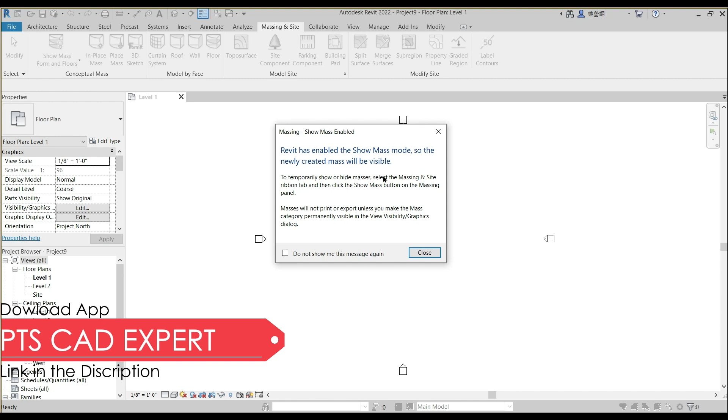If you click in place mass, this dialog box will pop up showing that Revit has enabled show mass mode, and so the newly created mass will be visible, and mass 1, and it opens up the mass environment. Another approach is while in project template, if you click on component and if you click on model in place and you navigate to mass and it will say mass 1, that will also open the same work environment.

The last but not least and my preferred option is while in home screen of Revit under family section, if you click new, it will navigate to this folder, and if you have your libraries extracted properly and in English Imperial folder you have all these template files, and in this you open up this conceptual mass and open up the mass template.

So all of these different approaches open up the same work environment, and we have the same tools for modeling purpose, but it is slightly different from what we used last time. Let me open up real quick and show you. There is new family and family templates English Imperial, and this is the template file generic model which we used last time.

And the difference here is that you can model a 3D element using this template, but it has these 3D drafting commands which we used last time for modeling a 3D parametric door. But today we are going to explore this conceptual mass environment, and I'll show you how those 3D drafting tools can be used in this environment, which is visually also a bit different.

That is, you can see that the background has this typical gray gradient, and it has the reference planes, that is the center, front, back, and left, right connected to it, and reference levels. Eventually, both the template files do the same thing, that is modeling a 3D element, but they do so by using different approaches.

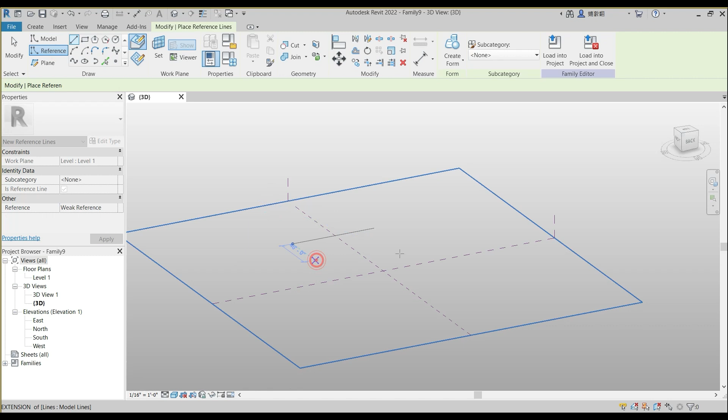That is, in mass environment, you have model-based forms using model lines and reference-based forms using reference lines. So to use these tools, I will set plane, and when I click a line, you see that it by default selects the model line. And if I draw a reference line, and if I get closer, you can see that the model lines are black in color and are a bit bold, then the reference lines, which are a bit thinner and purple in color.

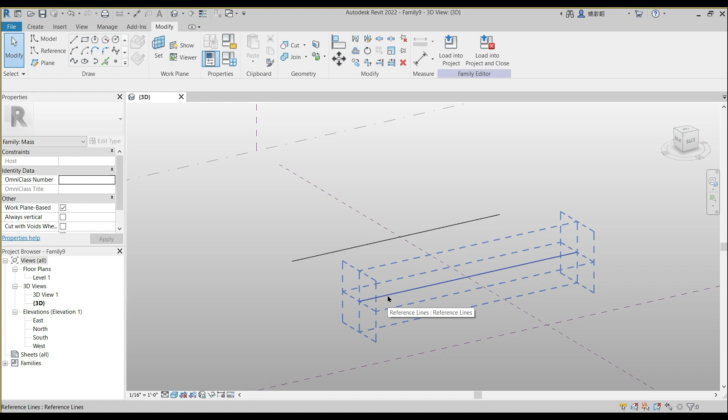Another distinct feature other than color is that when you hover your mouse onto this reference line, they have the integrated work planes connected to it, onto which you can actually model a 3D element and host a 3D element. And when you model a 3D element using the model lines and load them into the project, they are visible, whereas the reference lines are not visible in the project environment.

So despite the subtle and negligible differences, both these lines do the same thing, that is modeling or hosting a 3D element. Now the 3D commands that we have in generic model template files, we don't have them here, but how do we do it in this environment? And that I will show you.

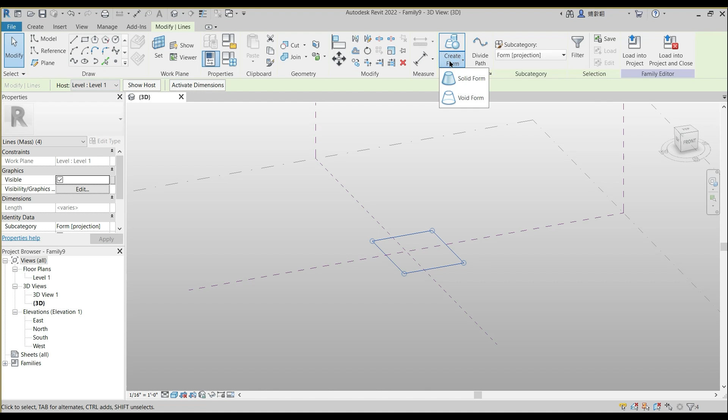So let's click on this rectangle, and by default it selects the model category, and by going to the set plane, I'll pick a plane and I'll draw a rectangle onto this, and now I'll just click this rectangle and drop down a solid form, and you see it creates a solid form that can be edited and that can be elevated to a specific height. So this was about extrusion.

Now blend. For that I need to create one more level, and yeah, it's already there. If not there, then create levels, and from here you can drop a level. And now I will set plane, and I will click this plane and go to top and draw a rectangle onto that, and from here I'll set plane, and placement plane I'll select level 3, and there I will draw a circle.

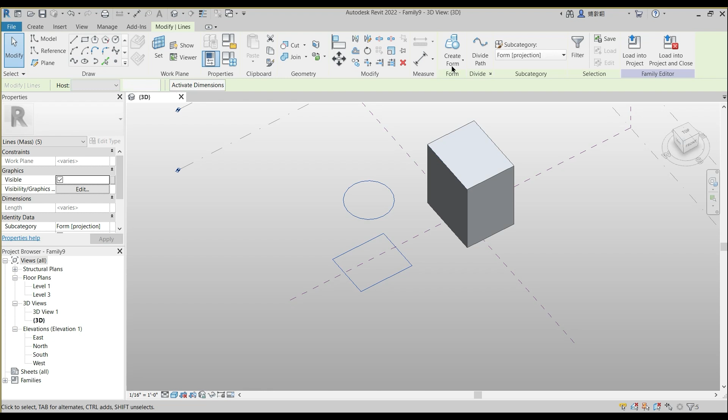So both of these elements are on different work planes. So if I select this and then this and go to create form in solid form, it will create a blend.

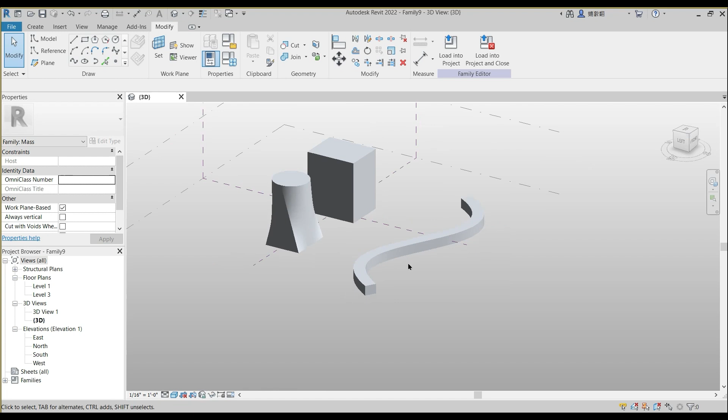Now let me show you sweep. So I will say spline through points, and I'll set plane, and I will draw a spline through points on that plane, and then I'll select this point and I'll draw a rectangle. And sweep is something which references a profile along the entire path. So I'll select this rectangle, I'll select this path, and I'll say create form. So there it is.

Similarly, we can also do a sweep blend. So how is that? So again, reference line, spline through points, and I'll set this plane and I'll draw a spline onto that. But this time I'm going to say set plane. I'll pick a plane and I'll draw a rectangle onto this.

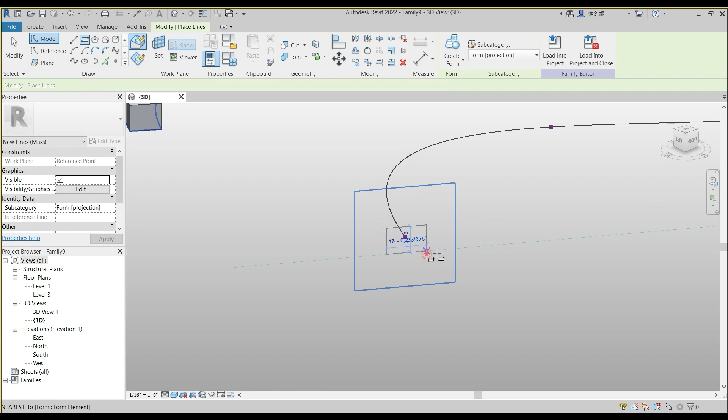And for a blend, I will select this point and select a circle and draw a circle onto that. And now I will select this and the circle, and there we go. Yeah, so this was sweep blend. That is, it is referencing two different profiles at either ends. Okay, so this way you can create 3D elements in the mass environment, which is a completely different method than what we saw in the generic model template file.

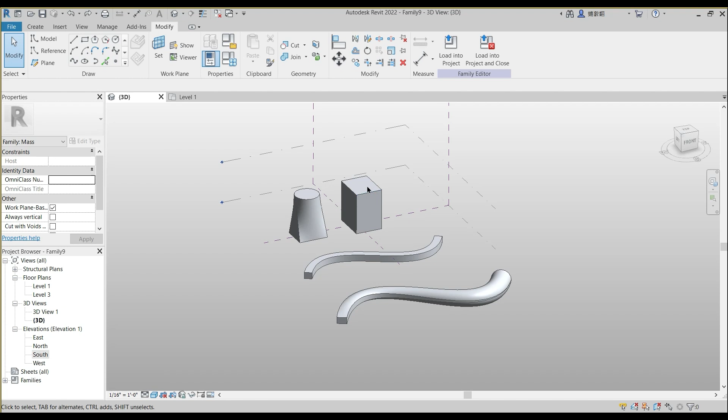Again, you can furthermore edit these 3D forms and manipulate them. Let me show you how. So I'm going to select this reference plane. I'm going to draw a couple of reference planes, copy, say, 25 feet on this side. Again, copy 25 feet on the other side. And I'm also going to make some reference plane here, 25 feet. Okay, CO, copy and 25 feet here.

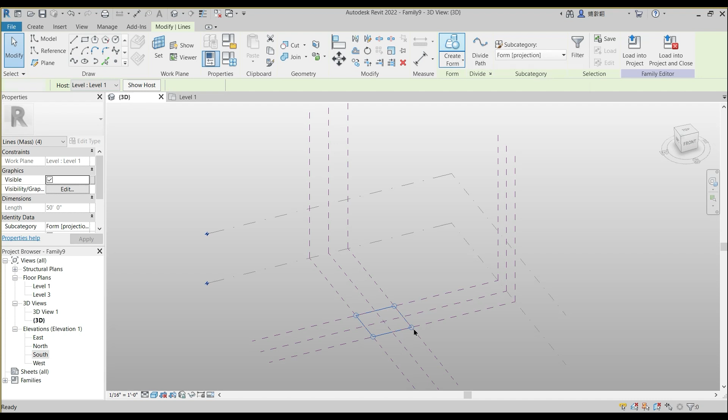Yes. And now I'm going to set plane, pick a plane, go top and rectangle and draw a rectangle onto that. And I'll select this rectangle and I'll say create form, and I'll pull this arrow up until it snaps to this upper reference level.

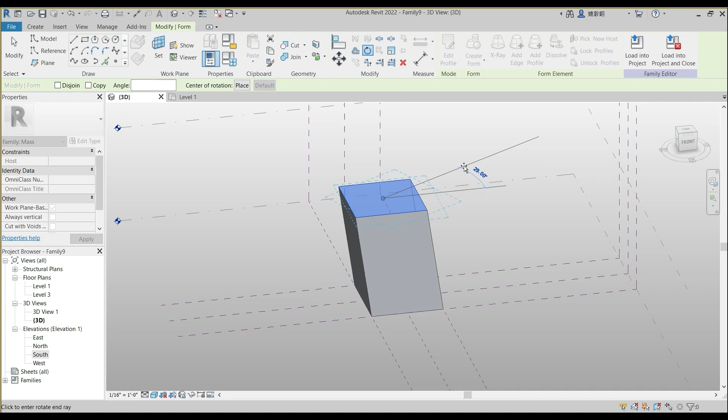So how can you manipulate this 3D form furthermore? And what is the difference when you model a 3D element in the mass environment? That is, you can select these individual faces and play around with them. For example, I select the top face. I can move it by pressing these arrows. I can play around with the gizmo, and also I can RO, rotate the upper profile a bit, and you have this twisted 3D mass element. And this ability is not there in the generic model template file, wherein you have to do everything manually.

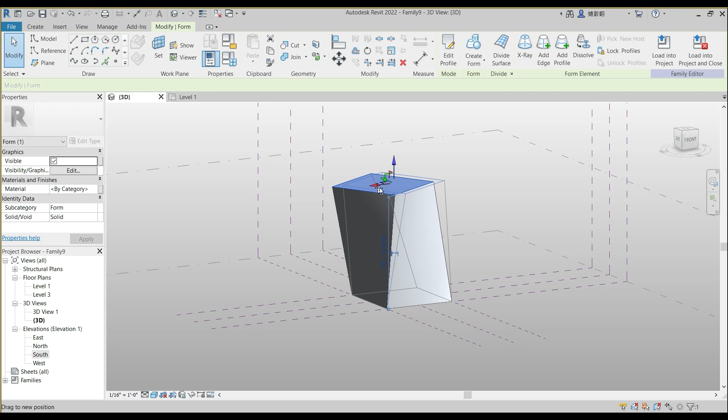Also, you can pull this up and you can press this arrow and make it slightly bent. And one more feature is that you can also select the edges and you can pull them in or out. And also you can make it up. And you also have these points on the end points of the edges, which you can also edit. Say you want this point a little bit up. And we have our organic, crispy, fascinating form. It's like that.

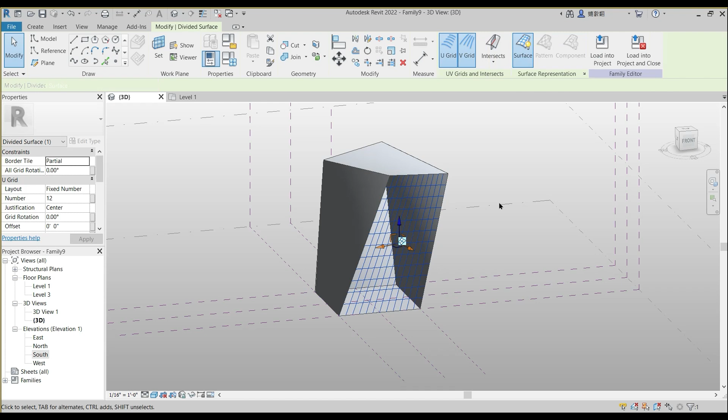What further can be done to this? You can select individual faces of this, and then you can divide the surface. Okay, no, not divide. First I will select this and turn the X-ray mode on, and it will show all the points varying from where it was created. And if you ever want, you can select this and add a profile. So I'll add a profile here.

And now I can select this and drag it a little bit up, and you see this has formed a bend between these two top and bottom edges.

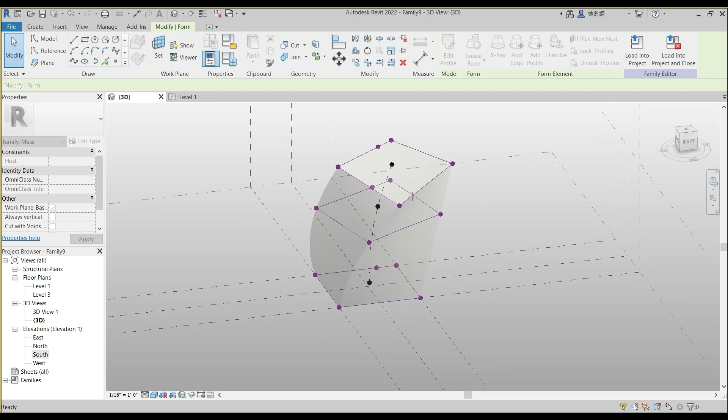The same way you can also pull out this, and also you can select whole of this and say add edge. And you can add edges to this form, to the vertical faces, and automatically, as soon as you add the edges, it adds this point and the line, which you can further manipulate and edit. So that is how it goes.

And I will add an edge onto the front face, and now I will build up, and we have a 3D organic form. And I will turn off the X-ray. Now what can be done to these faces?

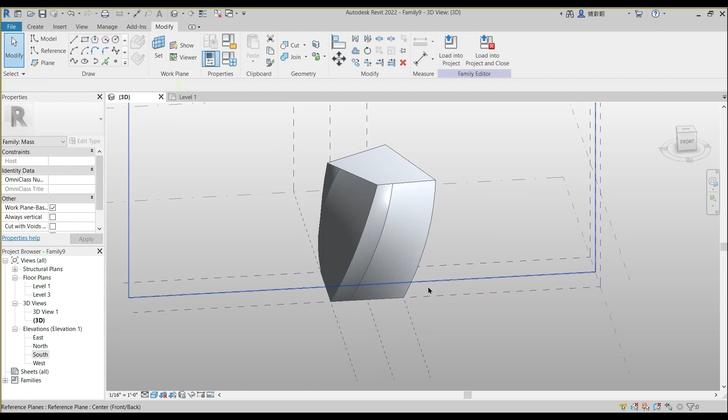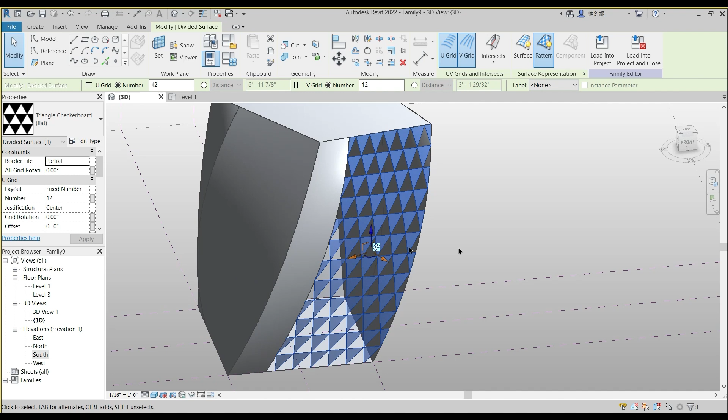For example, if I select this particular face, I can divide the surface. And I can add different patterns to it. For example, you see this is a triangular checkerboard pattern, and the rhomboid, and this is the rectangular checkerboard pattern. Yeah, but this is just a 2D element which doesn't have any thickness or mass, and it is just a pattern.

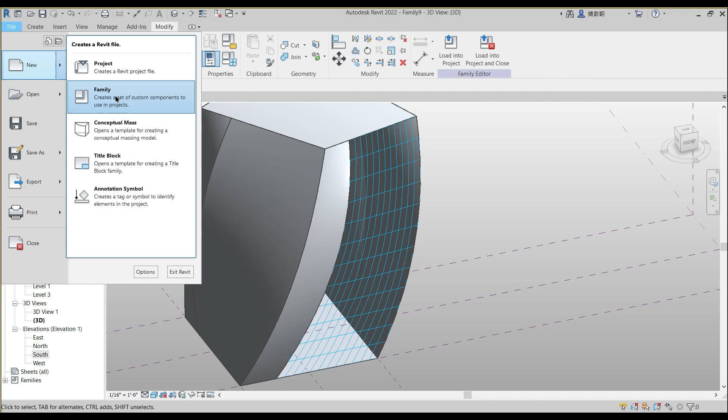And how can we further edit that pattern? For that, I will go to no pattern, and we will have this grid, and I will edit this grid. And how will I do that? Okay, so that is again a different file and a different template file. So from here I will open up this family, and by going to the Imperial folder, we have this generic model pattern base, or the curtain panel pattern base.

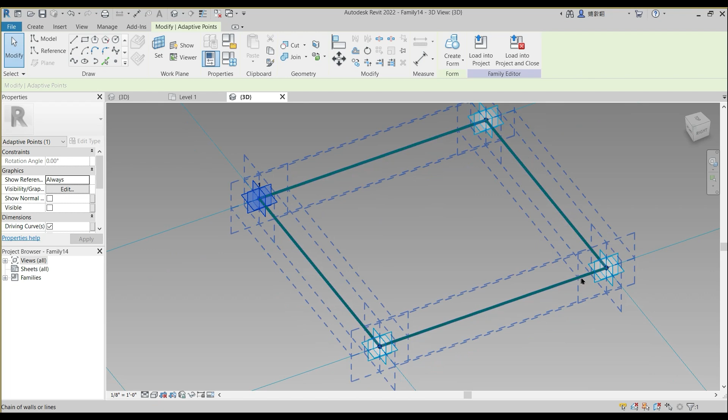Both are one and the same, but the only difference is that when you schedule or quantify it, Revit will read this file as generic model and this as a curtain panel. So for now, I will open this generic model pattern base, and it will open up this grid with the 4 adaptive points. When you click on the points, it will say 1, 2, 3, 4, and these green thick lines are the reference lines.

When you click this grid, and again drop down, you have the same list of different patterns which I just showed you, but that pattern is just a 2D element, and if you ever want to build thickness to it or design a parametric element, you have to open up this curtain panel pattern base family, and then by selecting this reference line, you can just create form. So this is the form which is stuck to this grid.

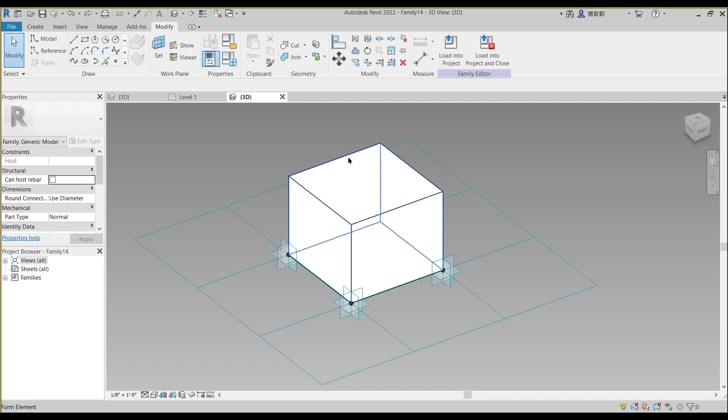So we are going to get rid of this 3D element, and we are going to actually model a 3D parametric element, constraining it and dimensioning it, and assigning various parameters to it. So let's start. So first I will say set plane, and I will dimension it from here to here, 10 feet, and similarly set plane, and I will dimension it from here to here.

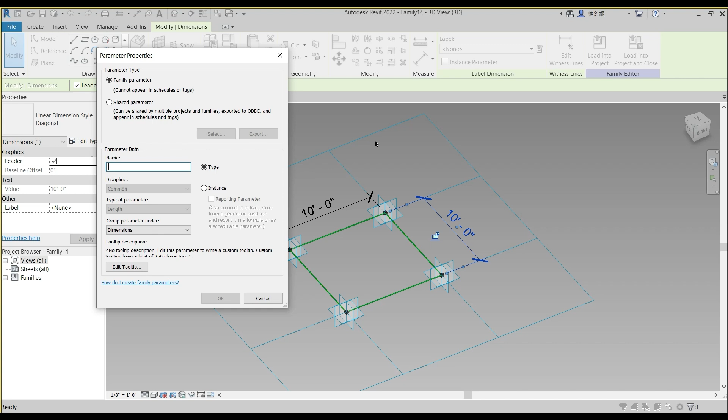I will make this temporary dimension a permanent dimension, into a parameter, and I'll call this B. I'll turn it into an instance and a reporting parameter. Reporting parameter because I want to report it back to the host family, wherein whatever size we change to the grid, this will adapt to it and report back to it. And this I'll change to A, an instance and reporting parameter as well.

Now I'm going to lay a point on this. And when you select this point, it says the normalized curve parameter is something. A normalized curve parameter with a point is something that divides a segment from 0 to 1. So if I want this point exactly in the center, then this normalized curve parameter should be 0.5.

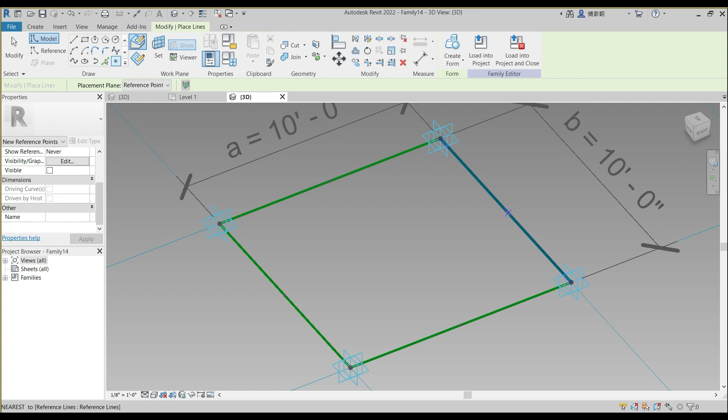And you can also place it directly when it highlights this little icon saying that this is the midpoint of the line. And I will place it here, and I will place it center. Just let me check whether I missed it. Yeah, no, it's 0.5. And now I will select these 2 points and spline through points, and it is a reference line.

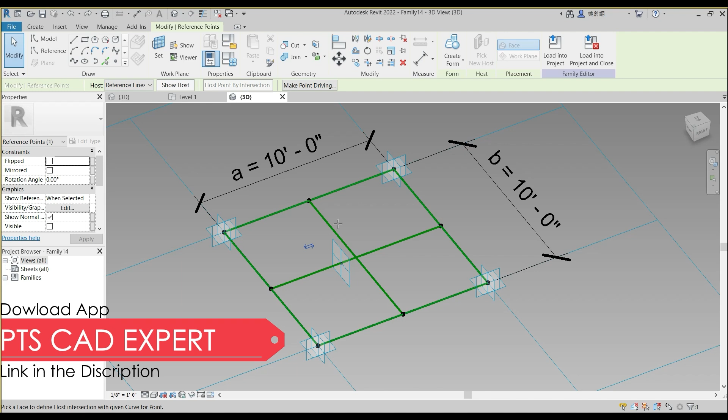And I will select these 2 points, spline through points, and it's a reference line as well. And now what I will do is simply lay the point onto this, and I will select this point, and I want it to be on the intersection point of both of these lines. So I will say host point by intersection, and I will select this line.

Now I will set plane, and I will select this plane and draw a circle, and I will turn that into a reference line as well, and I will make this temporary a permanent dimension, and select that dimension and make it a parameter, R, an instance parameter. And this time I'm not going to make it a reporting parameter, that's not needed.

Open up this family types dialog box, and we have these parameters here, and I'm going to add a couple of parameters. The one is the max R, that is maximum radius, and another is minimum, and that as well an instance parameter.

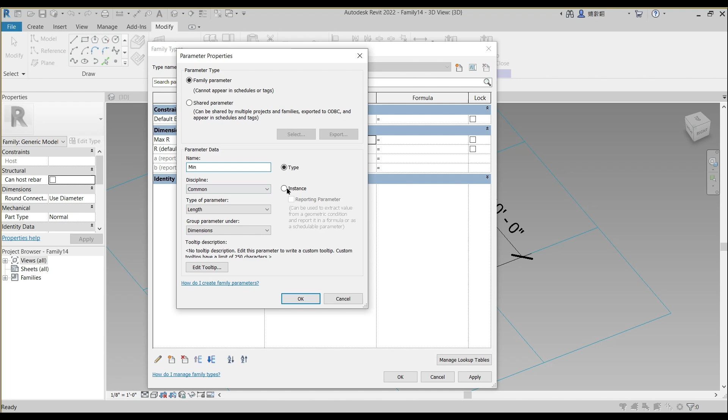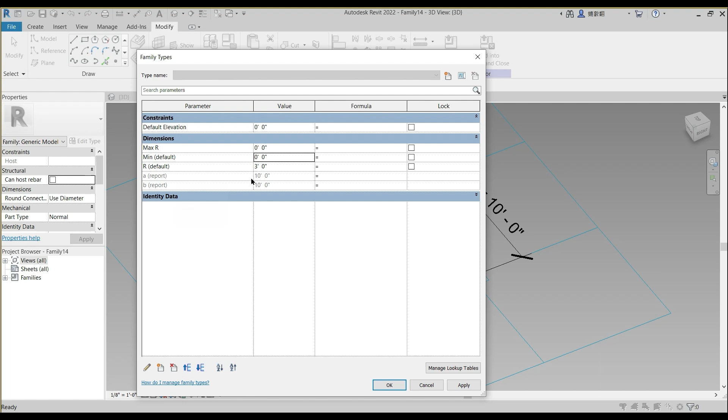Minimum is, this is leg A and this is leg B, and whatever is the length of both the lines in the host family, I want to find the minimum, and so I will just type in that minimum should be: if A is less than B, then I want Revit to choose length A, or else length B. Yeah, so that will be minimum. So right now both are 10 feet, 10 feet. So the minimum is 10 feet.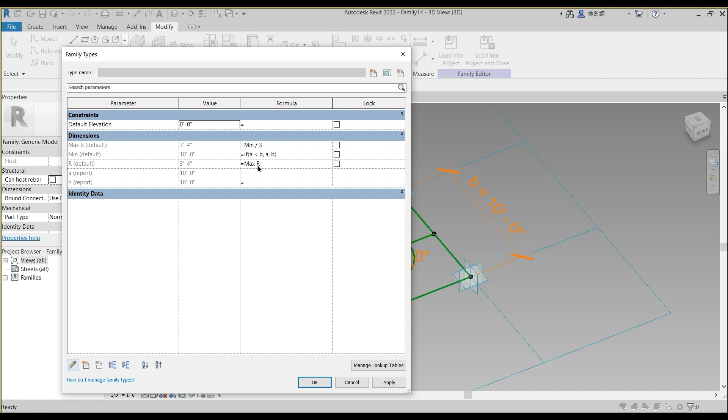And the maximum radius should be the minimum, whatever minimum length Revit decides, divided by 3. So that is 3 feet 4 inches. And in the R, I want the radius to be maximum radius. The reason behind doing all this: instance parameters cannot be used in a type parameter formula. Okay, so I need to change this max R into an instance parameter, since I want to use that as a formula for radius. So this R radius will be equal to maximum R, and apply, and okay.

The only reason for all this jugglery was that whatever is the length of this leg or this face or this face, I don't want this circle to reach up to this edge.

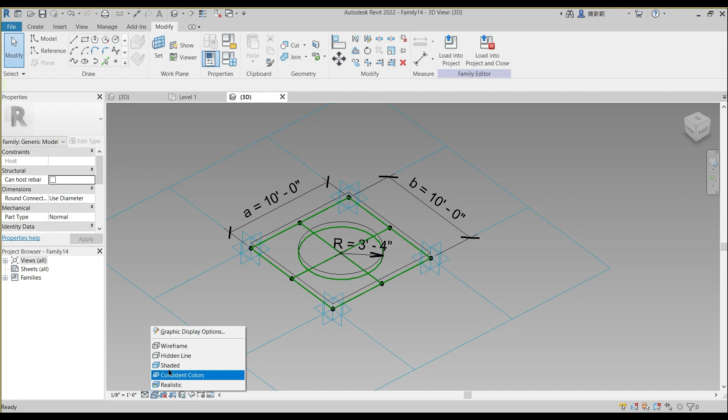We have this family which we can now host on to that family. I load this into this, and by going to 3D, I'll just select this rectangle which says no pattern, and I'll just drop down, and now under rectangle we have this family 14 which we just made, and I'll select that. Yeah, and we have this rectangular pattern onto this face of the mass.

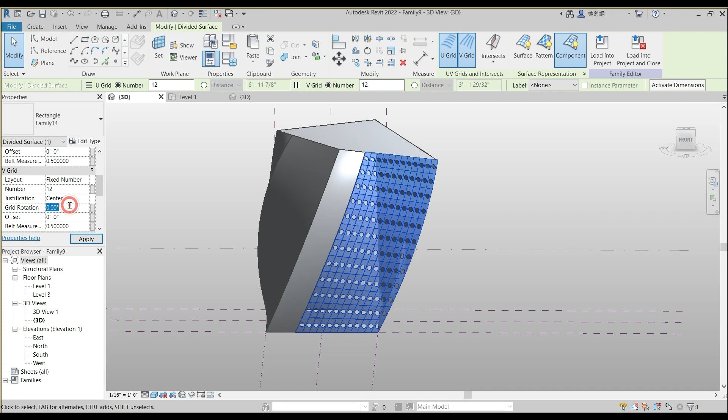Yeah. Now, how can you further change it? If you want grid rotation to be 45, say 45. Yeah, there we go. Now, this same thing can be done in the other way. Let me select this face and again divide the surface.

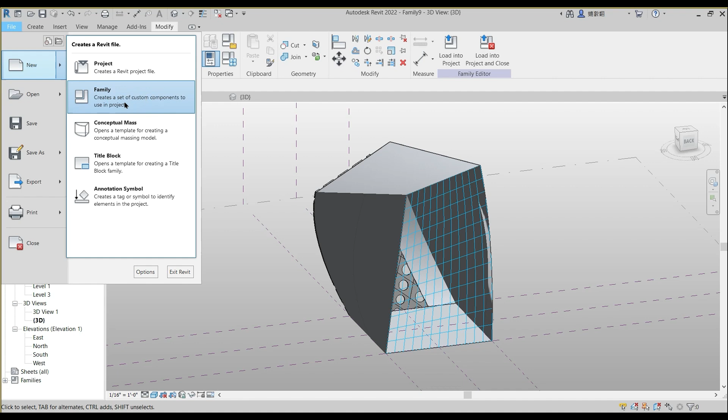And this time I'm going to say file, and I'll click new and say family, and this time from the English Imperial I will open up this file saying generic model adaptive. Yeah, and I'm going to create something similar to what we did here. The same family I'm going to create, but I'm going to show you what is the purpose of doing that in an adaptive family and what is the difference.

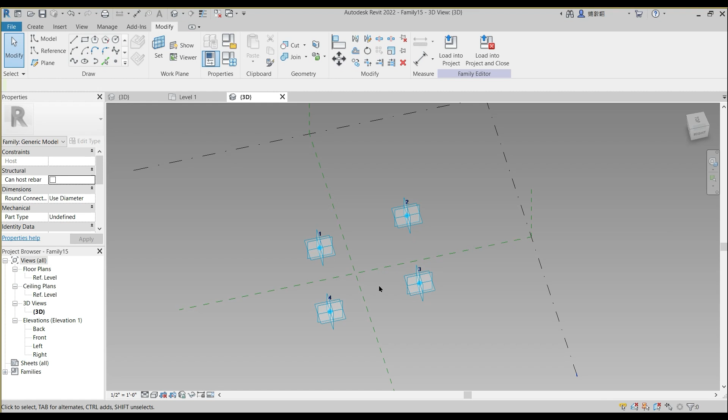So an adaptive family is made by using adaptive components. That is, if I place points 1, 2, 3, 4, and now when I select these and say make adaptive, it has this number 1, 2, 3 and 4. And now these are the adaptive points. The reason behind using this family and making these adaptive points is that I want to create a generic freeform pattern. I'll show you how that is done.

So I'll select 1 and 2, spline through points, and we will exactly follow the same steps like we did for the curtain pattern based family. Oops, sorry. 3 and 4, spline through points, and there's a reference line. 1 and 4, spline through points, and there's a reference line.

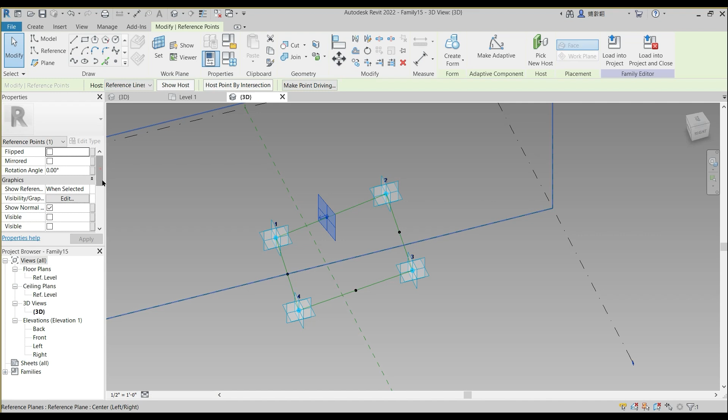And again, we are going to lay a point on the face of all the 4 lines, and I will select the center of that. I think I missed the center of this, yeah, so 0.5. And again, I'm going to select both of these, spline through points, and turn it into a reference line. Spline through points, turn it into a reference line,

and host a point onto this, say host point by intersection, set plane, circle, and I will create this, and I will turn that into a reference line as well.

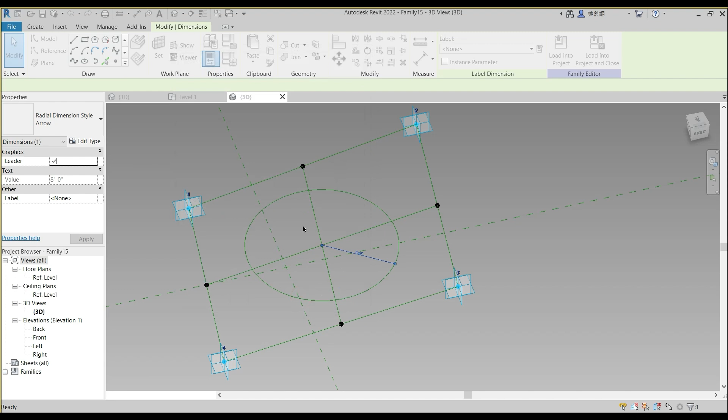And I will say this, oops, yeah, and I will make this a parameter, R instance. Yeah. And now I will set plane, and I will dimension this, and I will set plane, I will dimension this,

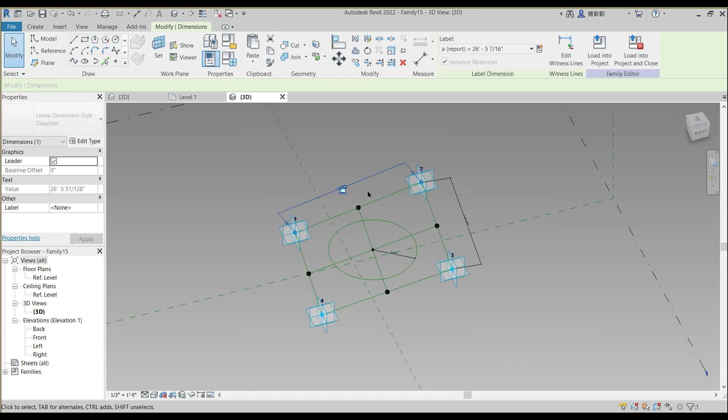and I will change both of them into the parameter. I'll say this B and reporting, and I'll say A instance and reporting parameter as well. And now I can just select this, create form, solid form, and I want it just to be 6 inches.

And go to wireframe and create form and void form. I'll click this, 5 feet positive offset. There we go. So we have created the same family eventually which we did for curtain panel pattern based adaptive family,

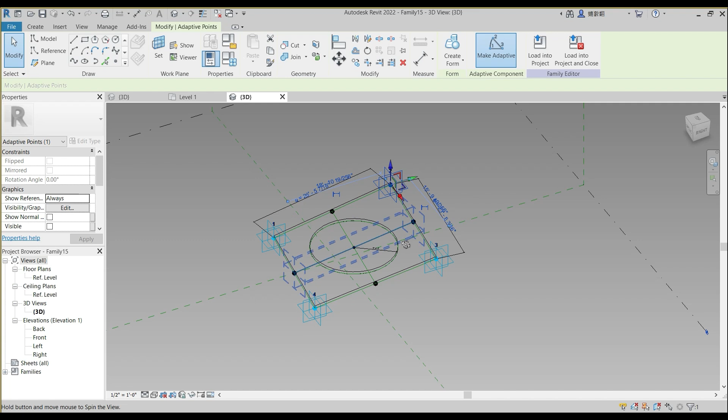but the difference is that here it is hosted by these adaptive points, and it's like a free form and can adapt to any size or shape. See, you can drag this and make it however big you want. And just one last thing we need to do is that going to family types, we again want to make

2 more parameters. That is, one is max R instance, and we don't need to make it a reporting. One more parameter, that is minimum, instance parameter as well. So for minimum, I'll type that if A is less than B, then I want Revit to select A or keep it B.

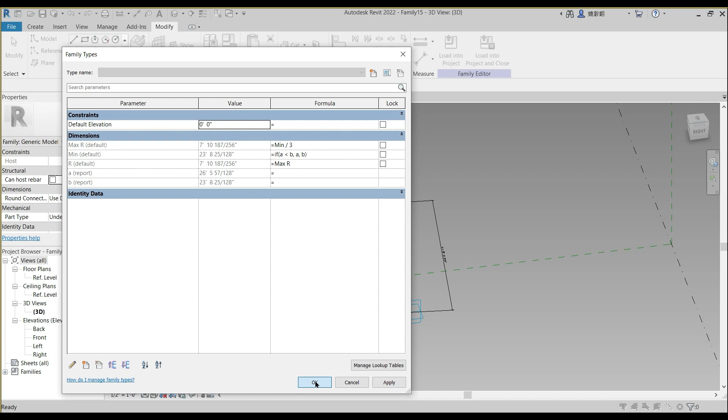So the minimum is 23 feet, and the maximum radius should be minimum divided by 3. So that will refrain the circle from going to the extreme end corners. And R, I will say max R. It's exactly the same process, but I will show you what is the difference. And now this is family 15, and I will load that into the project.

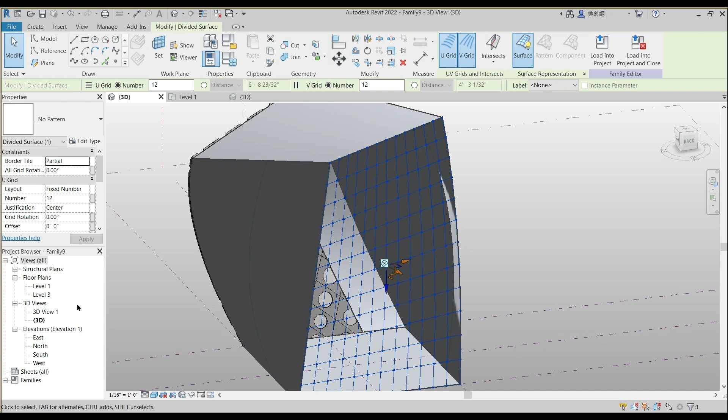And now you see, unlike pattern-based families, in this we have an ability to lay this family manually. So that was the difference I was talking about. So how can you lay this adaptive family? So by clicking surface, I can just click surface pattern and nodes, and okay, so that will turn on the nodes on this grid onto which you can lay that particular family.

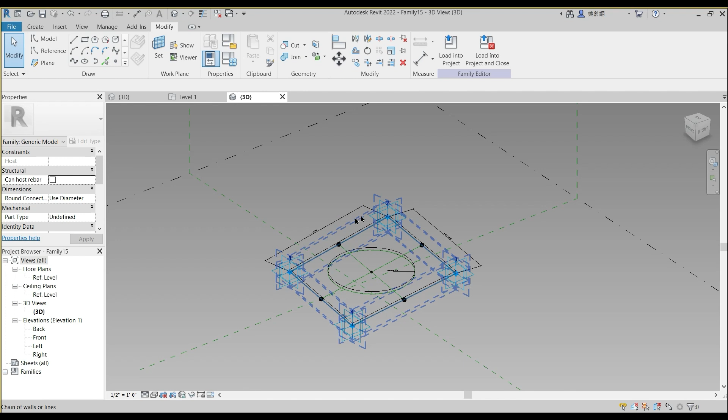That is the generic model, and it was family 15. Let's just drag that here, and now you need to lay that family. But what you need to take care of is that it has to be 1, 2, 3, 4, and it has to be laid in the same order. If you don't follow the order, then you will end up with errors. So I will delete this. I will say family 15 and drag, and 1, 2, 3, and 4.

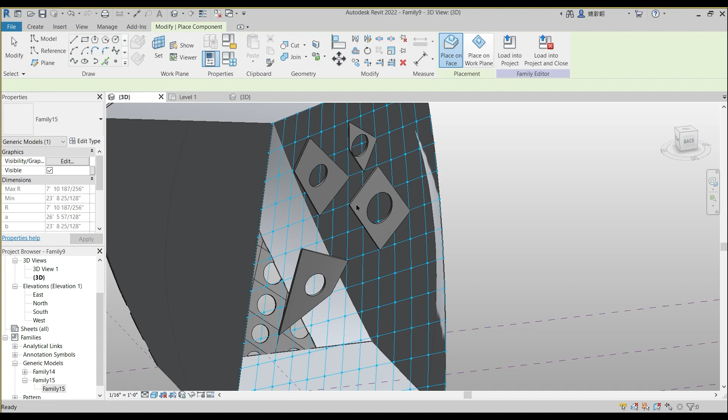Again, you can be creative in your own way and place that. And you see, this way you can create your own pattern. And there we go, like this. And the fourth point, I will select this. So this is the way you can create a pattern of your own by manually laying this. So this was the difference between this pattern-based family and these adaptive components.

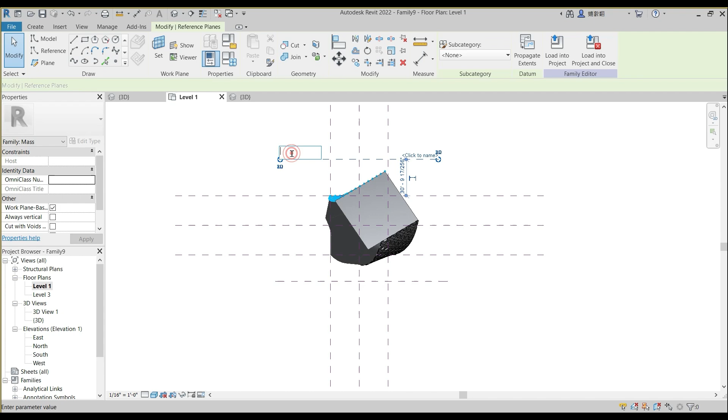So that's it. Again, what else you can do is that you can just select this, going to the level 1. I want to create 2 more reference planes, reference plane 1 and 2, and I'll call this 1, and I'll call this 2. I'll name this 44. So I will set plane, and I will select this reference plane 1, or I can

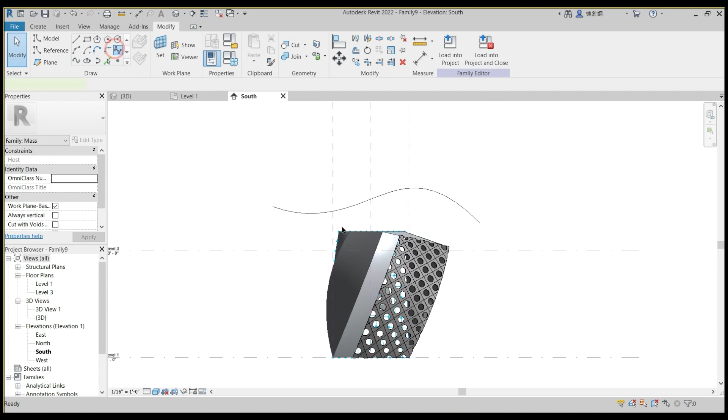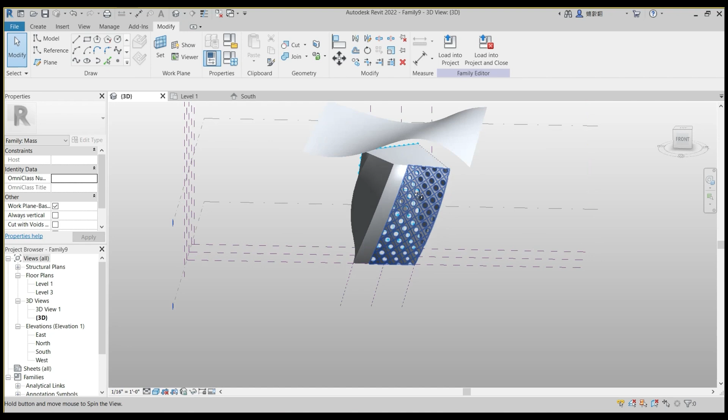And now I'll just go to 3D, and I'll select both of these and say create form. Yeah. So now this piece of sheet, this organic form, is acting as a roof for the structure. It's not realistic, but it's just to show you. Also, we can add supporting elements to that particular organic sheet. And I will say placement plane, reference level 3. No, it doesn't allow me to.

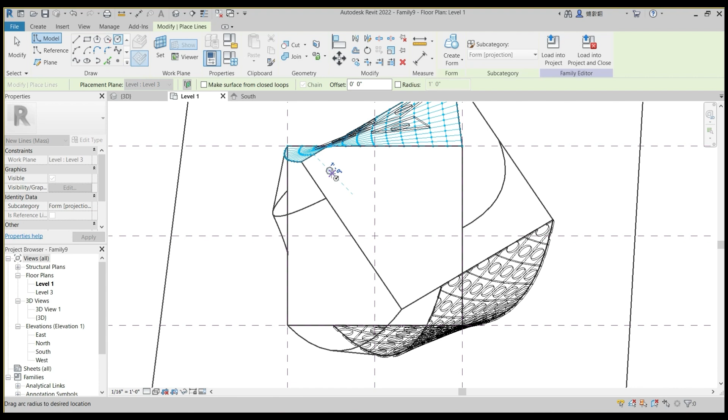So here I will draw 2 circles, on level 3 with an offset of 10 feet, so it will be visible. So I will draw a small piece of 2 circles, and then I'll go to 3D and it's created on reference level 3. So I need to select them both and move. I need to bring them up by unconstraining it and to this level. Yeah.

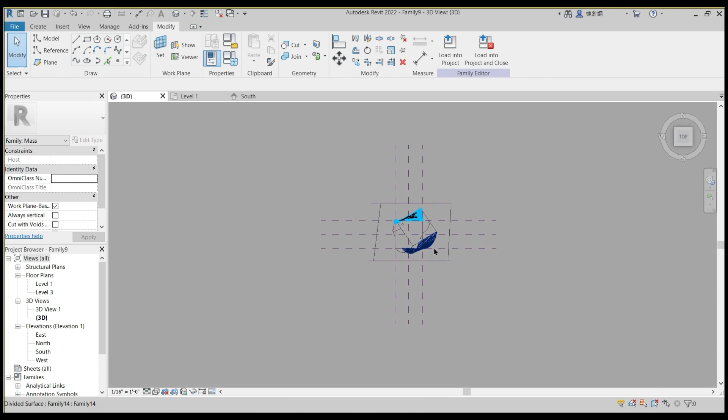And then I need to reposition them, yeah. And what I'll do is I'll just say create form, solid form, select this and let it go all the way up until it touches that. So that's a supporting element.

Let me turn on this to shade it. Yeah. I'll pull this down. There it is. So that is it.

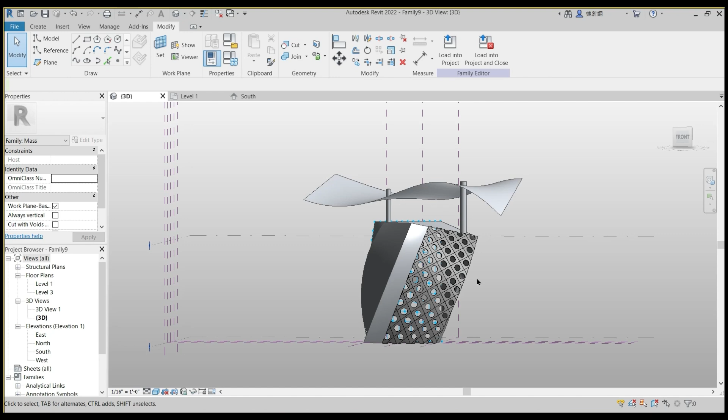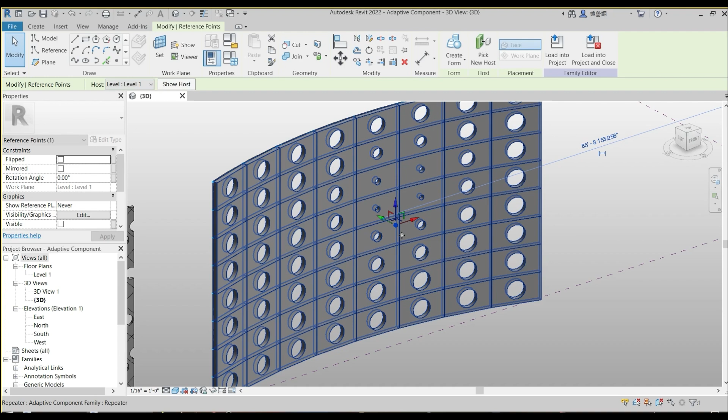So now let me open up this file and show you wherein I have also created these families, and you see it is the same family but a bit different. For example, if you select this point, it has one reporting parameter as well, the position of which, if you change, will eventually change the size of the punctures or the void within those panels. So that is it. Yeah. That is because this point is a reporting parameter and it's controlling the size of the punctures or the void within the circles. That is an extra feature which is added to this particular family.

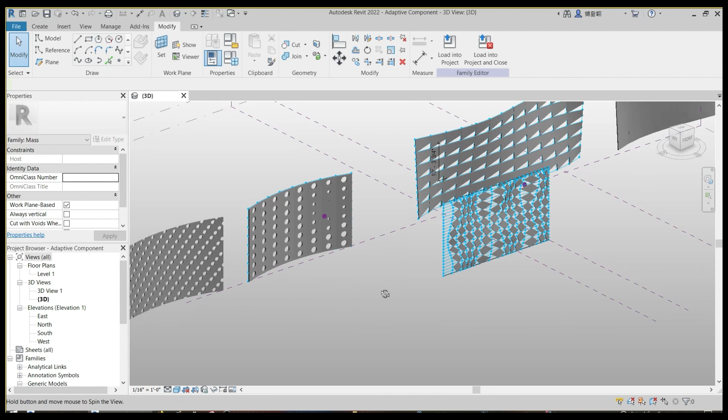Also, this is an adaptive family which has been laid in such a manner that it appears to be like a pattern onto this piece of fabric. So this was all about adaptive components and curtain panel or adaptive panel, generic model pattern based or curtain panel pattern based, since both of them are one and the same. So one more thing which I wanted to show you is also an introduction to scripting language, wherein we can also create such designs which are more customizable and more editable, and we can have more variations and more options.

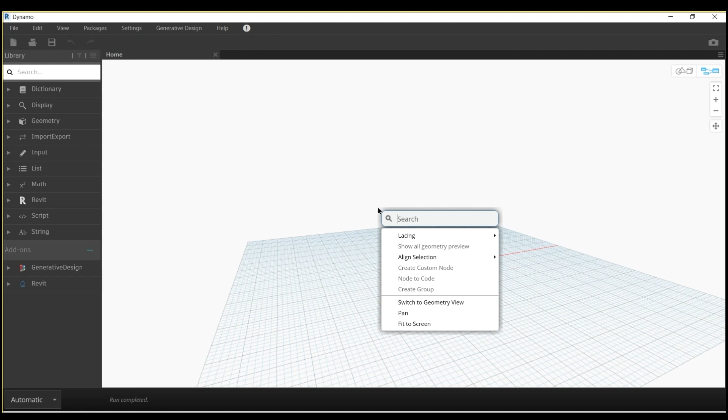So from the Manage tab, you have to click on this Dynamo, and this will open up this interface, which is altogether a different working interface than what we saw so far. And here it works in a totally different manner by calling out the nodes. And since this is a programming language, I'll not go into much detail of each and every node, and I'll be very precise and stick to the point, since this was just an introduction to visual scripting language, and if you ever want to learn this in detail, then you have to enroll for the course.

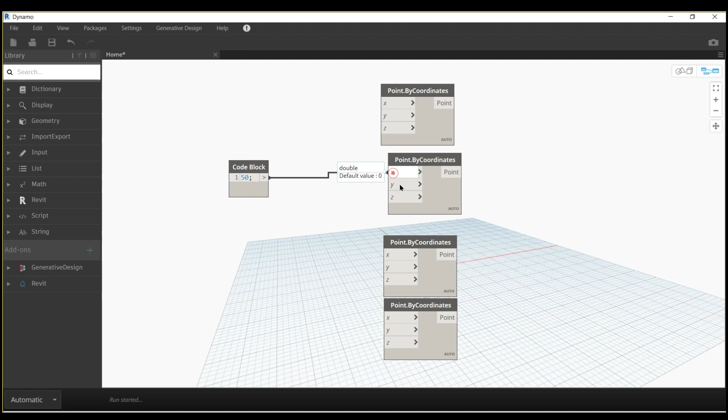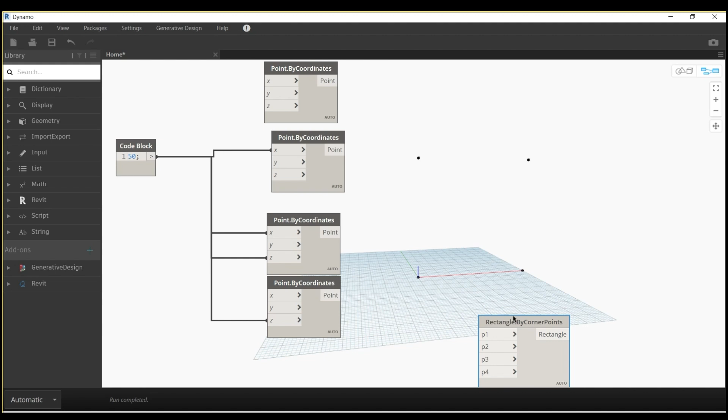So code 50 and Control C, and I'll create a couple of points. And I'll say this to be X, this to be X and Z, and this should be Z, and it creates the series of 4 points. So now again back to node mode and rectangle by corner points, then P2, P3, P4, and 1, 2, 3, and 4. And I'll turn off the preview for all these nodes since we don't need to see that.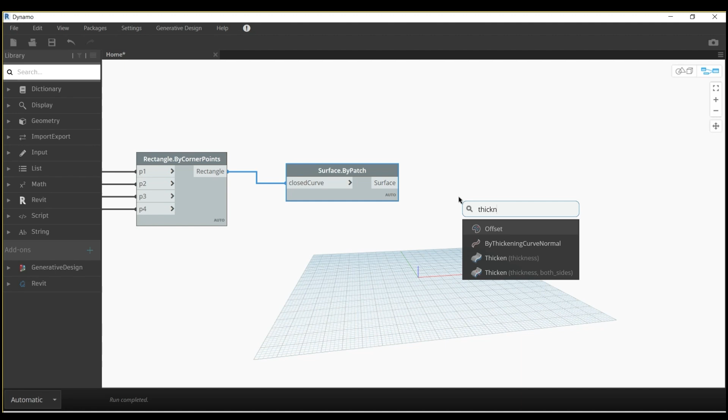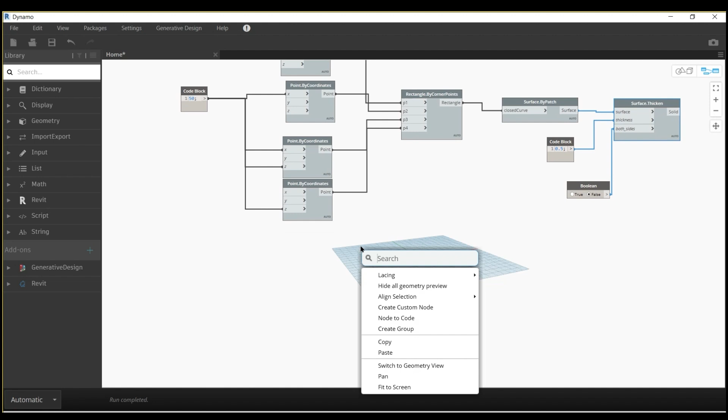Patch, closed curve, thickness, surface and code block 0.5, boolean, false, and yes. Yeah, I will turn this off for now, and I'll create another point by coordinates.

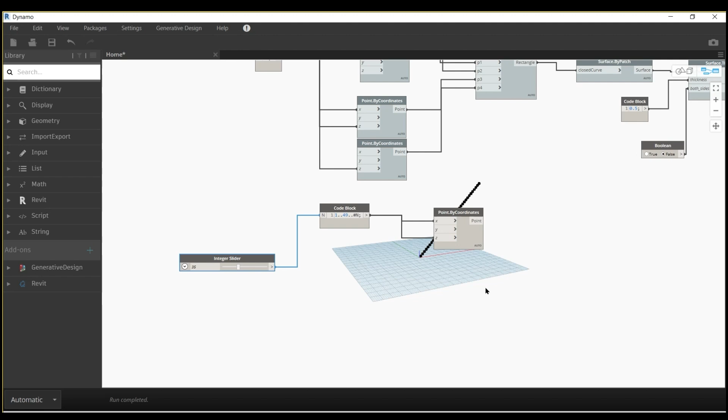At this time I'm going to add a sequence 0..49..#n and call for integer slider, connect this into n, x and z, 25 or 35, whatever. Turn the lacing to cross product and reduce this to 25 for now, and then node x times x goes to Math.Random list.

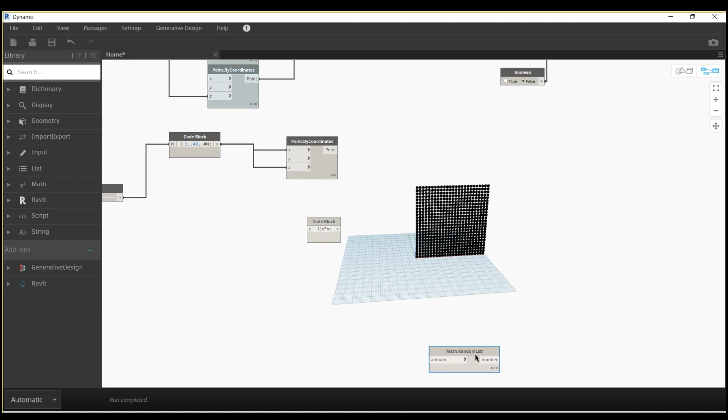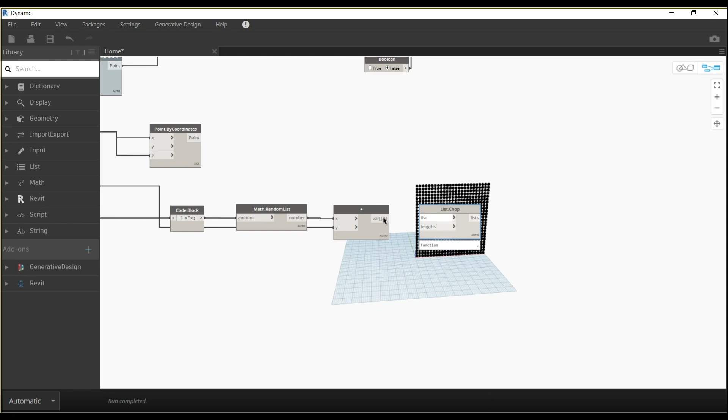List, and x should be this, and times, and 20, what was 25, okay, change this into 5, chop list and length, sorry, this should be in length and this should be number slider from 0 to 1, so the count of 0.1 is very small, 0.25, and that goes into the Y.

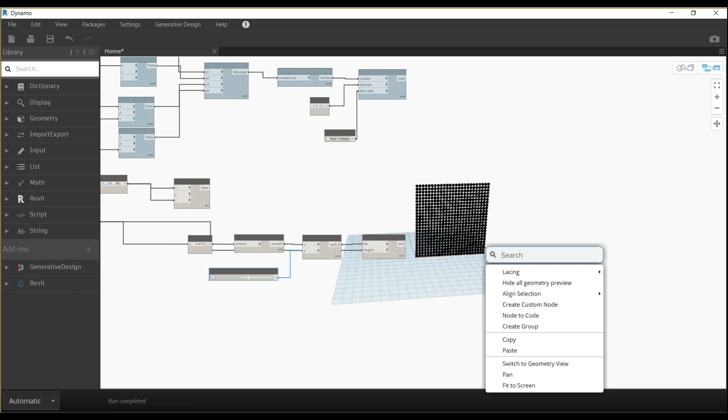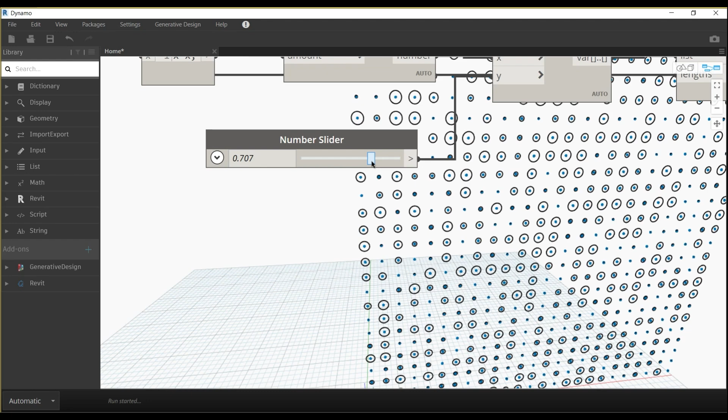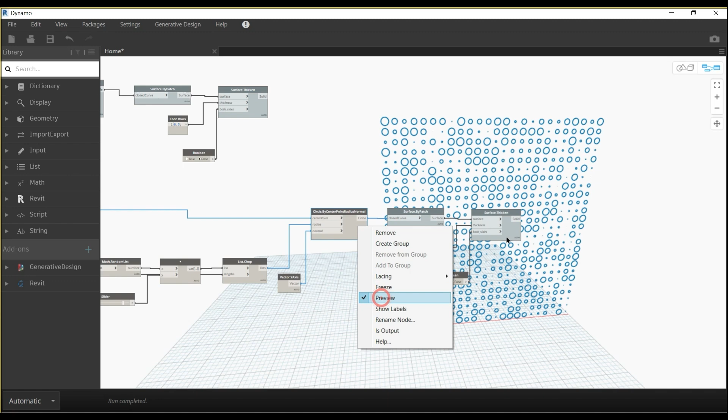Flatten, now circle by center point radius normal, and I will say this radius should be this and normal should be y-axis, and see it has created the circles but very small, so increase this size. So this is the randomization which I was talking about. Again the same nodes, Control C, Control V, Control C, Control V. Turn this off and just have a look. Yeah, there we go. And this should be actually 1.

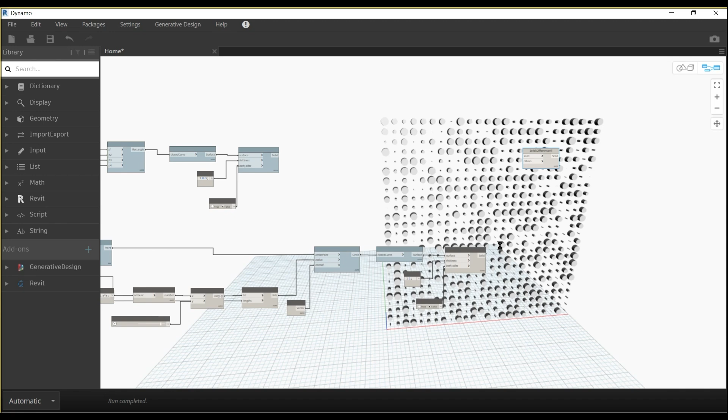Okay, difference all. Surface thicken should go into the solid. And this should go into others. Oh, what's the problem? There we go. Preview off, and there we go.

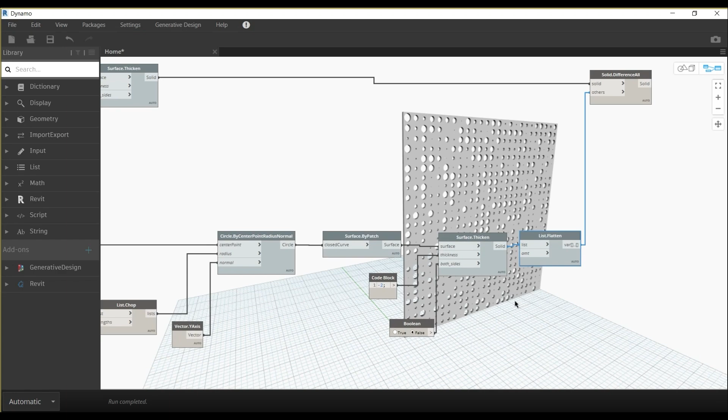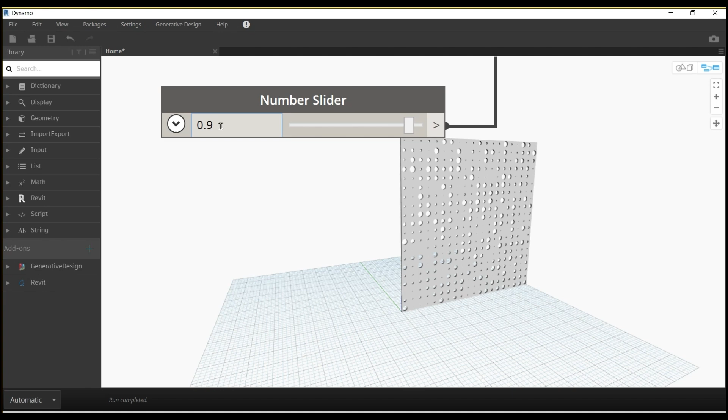So now the difference is that you can just play around with this as per your need. So you see the number of circles has increased and it has started even overlapping. Again, we will reduce the number to something like 15. Oh, that's too less. So 20. Okay. And also we can increase and reduce the size of the circles. So if I put 0.9, you see the circles have got a bit bigger. We change it to 1. So that's it, and that's all for Dynamo.

So this was a very precise and short introduction to visual scripting language, that is Dynamo, the plugin of Revit. And of course the adaptive components, the pattern-based families, and conceptual mass environment.